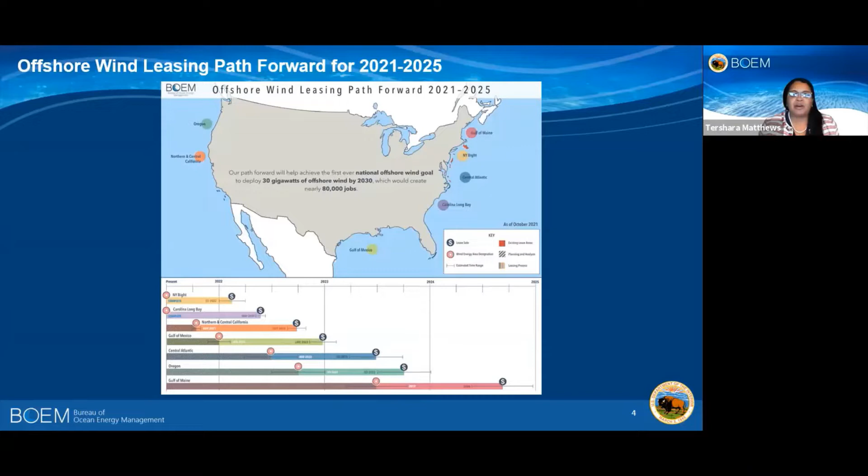In January, President Biden issued Executive Order 14008. It announced the first ever national offshore wind goal to deploy 30 gigawatts of offshore wind by 2030, which would create nearly 80,000 jobs. So what is our path forward to achieve this goal by 2030? Next slide. On October the 13th, Secretary Haaland announced our path forward for 2021 to 2025. This is our national leasing schedule. If you notice where all of the dollar signs are on the graph, that's where we have potential lease sales happening throughout the nation. Next slide. Next slide, hit one more time.

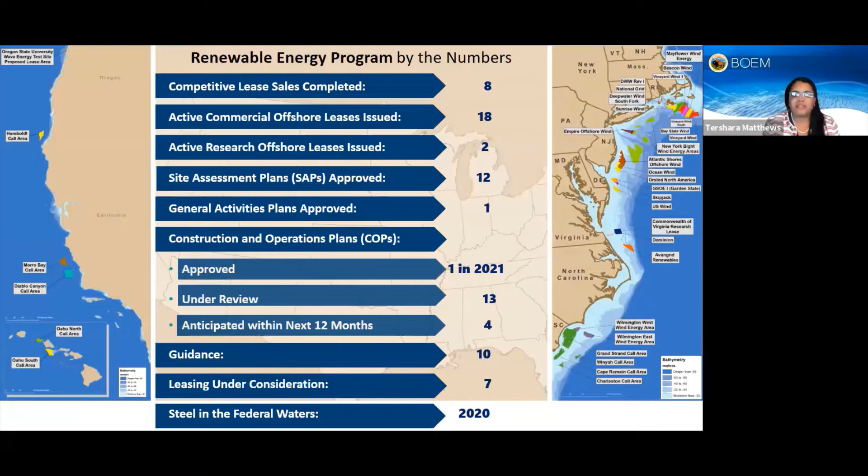So I wanted to give an overview of the actual renewable energy program throughout the nation by numbers. So we have completed 8 competitive lease sales. We have 18 active leases issued. We are also at that construction and operation phase, as I mentioned, in the Atlantic. We have approved 1 this year. We have 13 that are under review. We have 4 that are anticipated to come into the office within the next 12 months. And as I mentioned earlier, we have 7 areas that are under consideration for leasing. And we were extremely excited to have steel in the federal waters in 2020. Next slide.

So how are we going to get to that 30 by 30? We have the estimated capacity for those construction operation plans that have been filed to give us 19 gigawatts. For the remaining lease areas, we have 8 gigawatts. So we do need additional lease areas to achieve that 30 by 30 plan. Next.

So now I'm going to go a little bit deeper into the Gulf of Mexico. I'm going to give you a little bit of background information of how the program has recently started, talk about the renewable leasing process, and also the next steps for the program. Next slide.

So last year, we announced 2 studies that were conducted by the National Renewable Energy Lab, NREL. The first study looked at a survey and assessment of ocean renewable energy resources in all of the Gulf of Mexico. This included wave, wind, and also solar. We also conducted another study to look at the economic feasibility of wind in the Gulf of Mexico. Is it economically feasible to have wind in the Gulf of Mexico? And if so, where? So these 2 studies sparked an interest in the Gulf. Next slide.

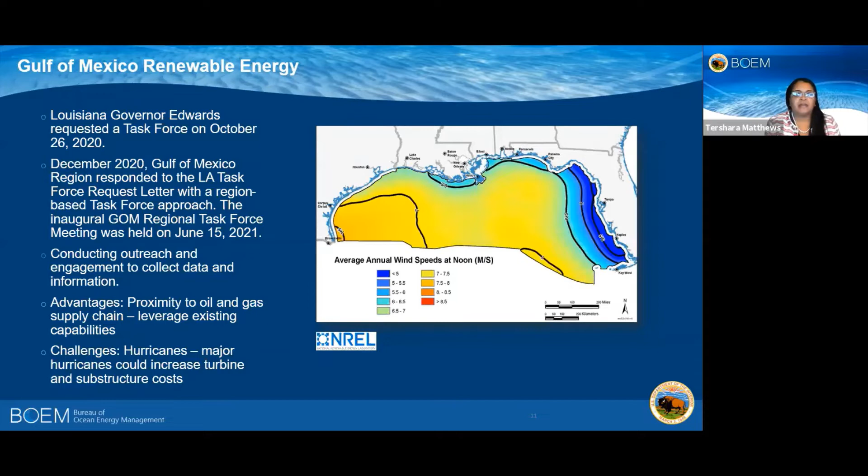Of course, as many of you know, there are definitely challenges with hurricanes in the Gulf. But after speaking to several industry representatives, they acknowledge that the hurricanes are a challenge. However, with technology, they feel that they'll be able to overcome those challenges with hurricanes. Next slide. As I mentioned, the 4 stages of the renewable energy process, you can go ahead, next slide.

The Gulf of Mexico is actually at the very beginning. We have not leased anything. We're in the process of working on a lease. So we're at that planning and analysis phase. We have formed that task force. We have issued the request for interest. We also recently issued the call for information. I'll talk about that in a little bit more.

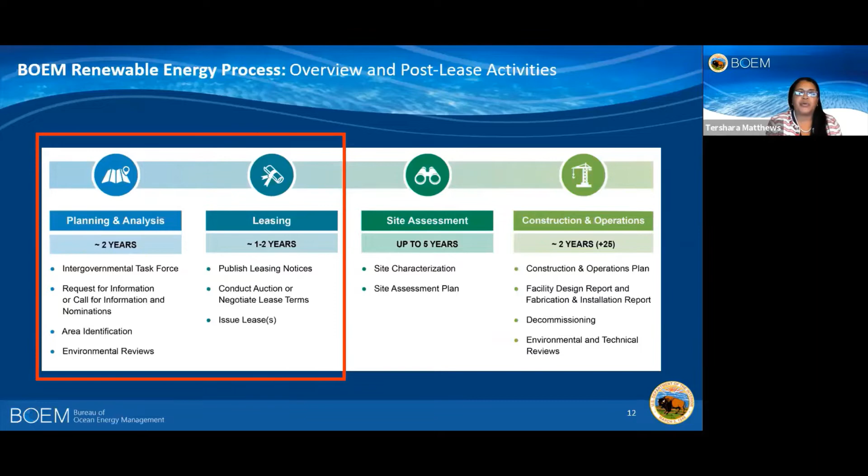The next step for that would be the area identification, where we have this lease sale, what areas, and then of course the environmental reviews. And as I mentioned in the earlier slide, we're slated to have a lease sale for December of 2022 or early 2023. Next slide.

So if you go a little bit deeper, you can go ahead, next slide. It shows the request for interest. That was published on June the 11th of this year. That included a 45-day comment period, which ended on July 26, 2021. Next slide.

Now we're at the call for information phase, which was just announced on Monday, November the 1st. That includes also a 45-day comment period, which will end on December the 16th of 2021. So following that call for information, we'll do more in-depth analysis to determine those wind energy areas. Next slide, please.

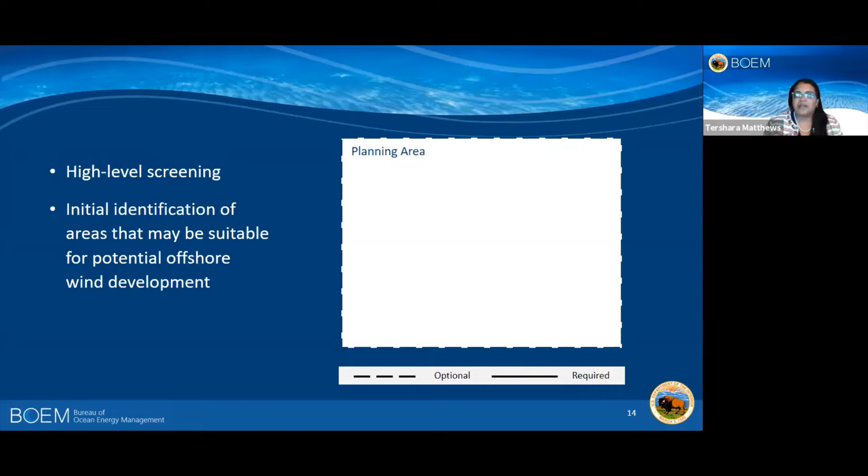So when you start out planning these wind energy areas, you start from a very large planning area. So for us, it was the Gulf of Mexico, and you do a high-level screening to best find out what are those suitable areas for offshore wind. The NREL study definitely helped us to try to narrow down where those areas are. Next slide.

So that helps after looking at where we think the interest may be. We were able to come up with a request for interest area to collect that information to see where industry is interested in, and what are some environmental concerns that we need to think about as we move throughout this process. It's definitely a winnowing down process. So next slide.

So now we have a call area, which is going to be a smaller area, and I'm going to show you maps to show you how we're going from this larger Gulf of Mexico down to this small call area. So these areas will definitely be considered for leasing. However, we will winnow this area down even more, looking at environmental, soil conditions, military concerns. Those are just some of the factors that we're analyzing as we determine these areas, and also existing oil and gas infrastructure that is also in the area. Next slide.

So the wind energy areas, once we have determined that area, they can be further divided into smaller lease areas, because companies may not want to bid on the whole area, so we can further divide that down into smaller pieces. Next slide.

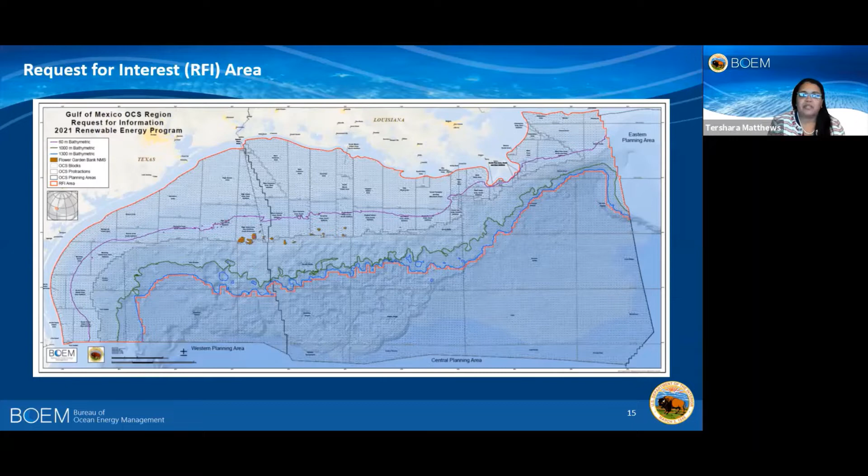So this was a request for interest area that we published in June. It goes from the Alabama-Florida line all the way to the Texas-Mexico border. The water depth goes out to 1,300 meters to see if anyone was interested in floating wind technology. So as you see, it's a very, very large area. So that starts with the first process. Where are you interested in possibly having offshore wind? Next slide.

From the RFI, we actually received 39 comments. 10 of those comments were from industry that provided us a little bit more information of where they're interested in their wind farm areas. Next slide.

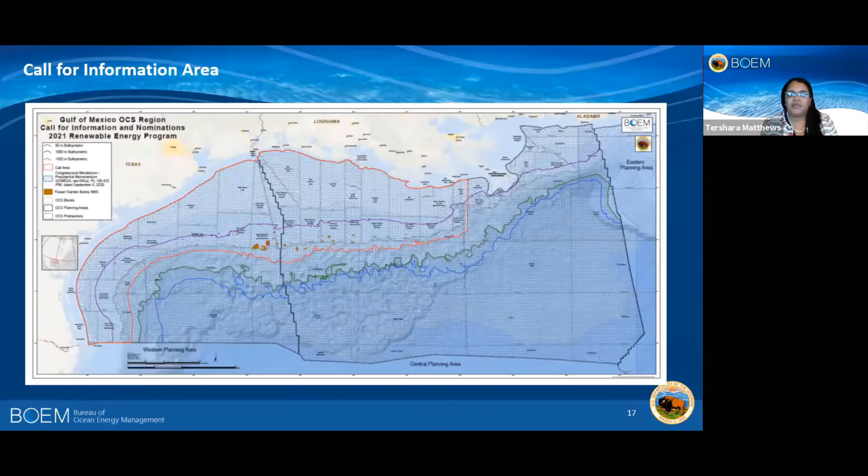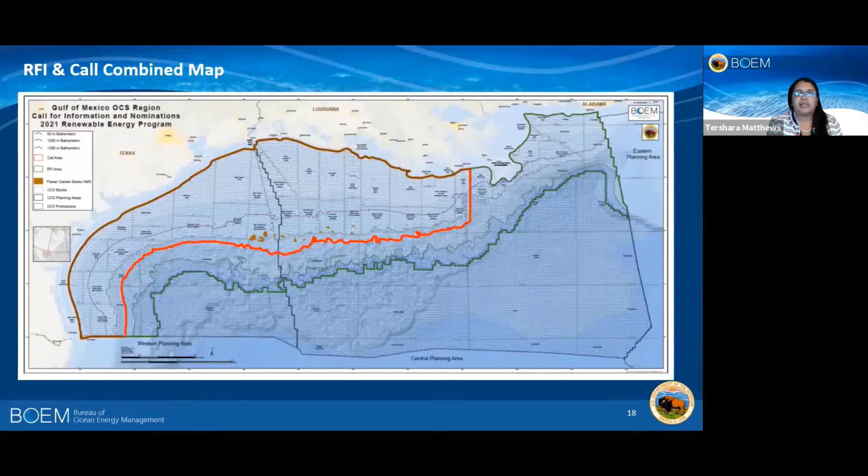So this is a combination map showing you the winnowing down process, how we have gone from the RFI area, which went out to Alabama, Florida. Now we're just off the coast of Louisiana and Texas, showing portions of our central planning area and the western planning area. Next slide.

So here are some of the next steps. As I mentioned, November the 1st was when the call went out. That closes on December the 16th. We will hold a second task force meeting in January. We'll start that environmental assessment on the call area and identify those wind areas. In the process, we'll also continue our stakeholder engagement. We have planned some fishery workshops that will also take place in January as well.

So as we continue to move through this process, we're gathering that information and data from our federal and state partners, tribal nations, and also the public, to better understand what areas need to be included in the wind energy areas as we continue to winnow down the areas in the Gulf of Mexico.

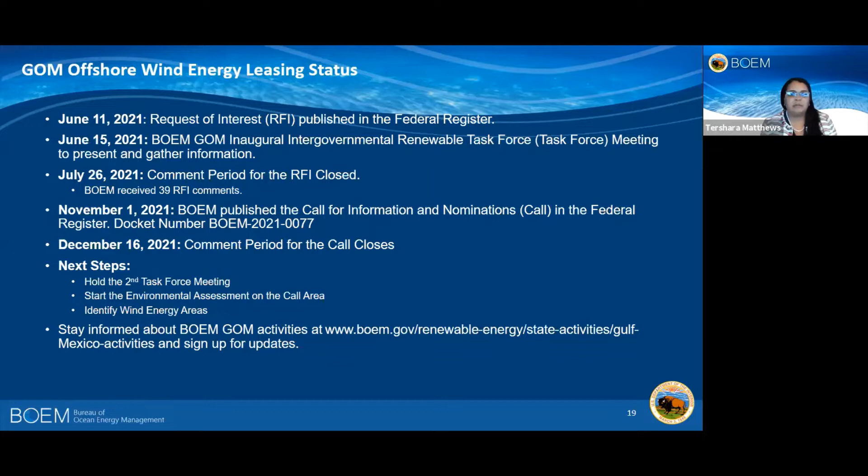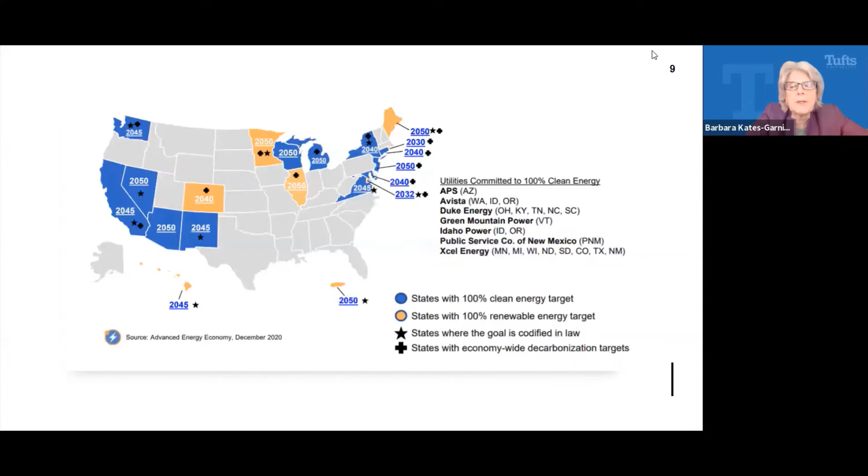And some states, and particularly states that really are planning for offshore wind, have also established roadmaps to clean energy. And it reinforces the point that offshore wind plays an important part. And if you're interested in learning about where the states are going in more detail, these roadmaps are really very helpful in understanding the transition to clean energy.

So how do we procure offshore wind? This is building off of BOEM. Usually it's the developers and the generators who bear the initial development costs. And what their costs are will become evident in their responses to the state RFPs, requests for proposals. Usually the method of procurement is a purchase power agreement.

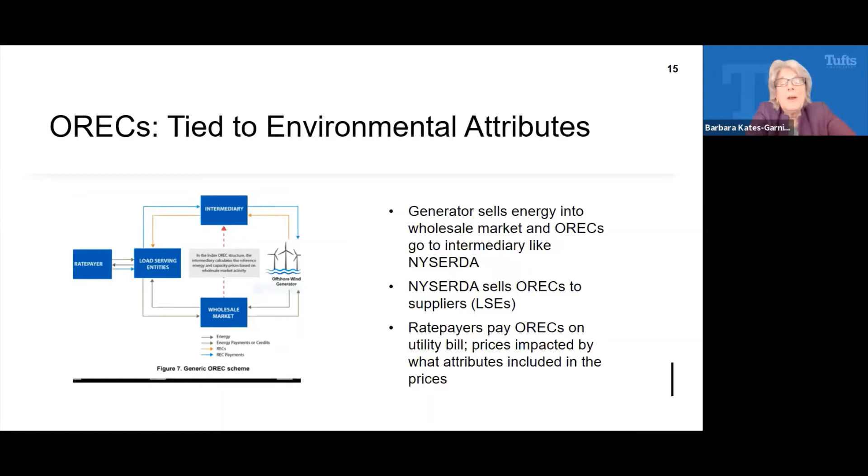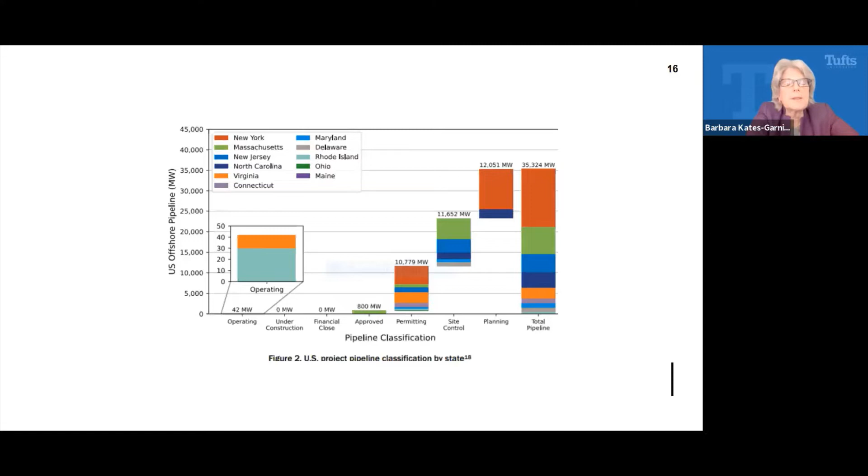Next slide, please. And again, this is sort of another reconfiguration, looking at the states, looking at the timelines, looking at what's procured. It's just very helpful to see what a large commitment these coastal states have made to date. Next slide, please.

Another big issue is offshore wind transmission and grid integration. We don't have a lot of time to discuss that. Maybe it's an issue that will come up in the question and answer. It's very important. Right now, the generators play a lot of role in the interconnection, but really FERC is looking at this in an ANOPR that it has just issued as part of a broader infrastructure look at grid integration.

How we configure the offshore grid will become very important. We don't want to stop the process, but we just have to say that this is going to be a very costly infrastructure build to get offshore wind into the grid.

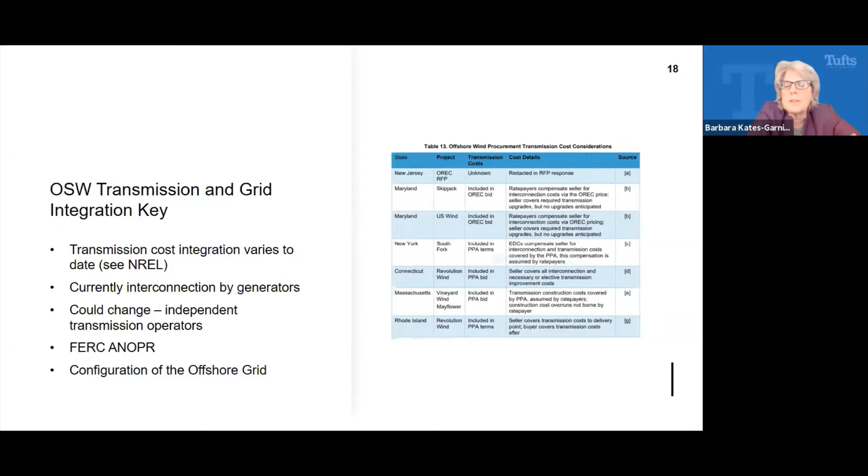Next slide, please. And finally, we've seen from my presentation that there are a lot of challenges. A lot of things are uncertain, but we really do need to achieve the promise of offshore wind. As I said, there are development challenges.

We have to look at more closely what kind of foundations we'll be using. We'll have to look at supply chain, ports, installation vessels. These could delay offshore wind if they're not done in a timely way. So even these aspirational goals could be delayed to a point in time where we won't meet our targets.

The environmental challenges are very real. We see the clean air and the emissions reduction, but their impacts on birds, right whales, the fishing industry, all of which have to be considered. I mentioned the infrastructure challenge, the grid integration, the siting, the role of FERC, the independent system operators, and the states are all going to have to get involved.

Pricing challenges. Yes, prices are falling. We still are going to need federal subsidies, but we need to, as consumers, better understand the true costs and benefits of these projects. And finally, public engagement. And this relates to equity. What is meaningful engagement? At what stage of the process does it happen? Otherwise, we're not going to realize the jobs, the goal of the price reduction, and ultimately the clean energy.

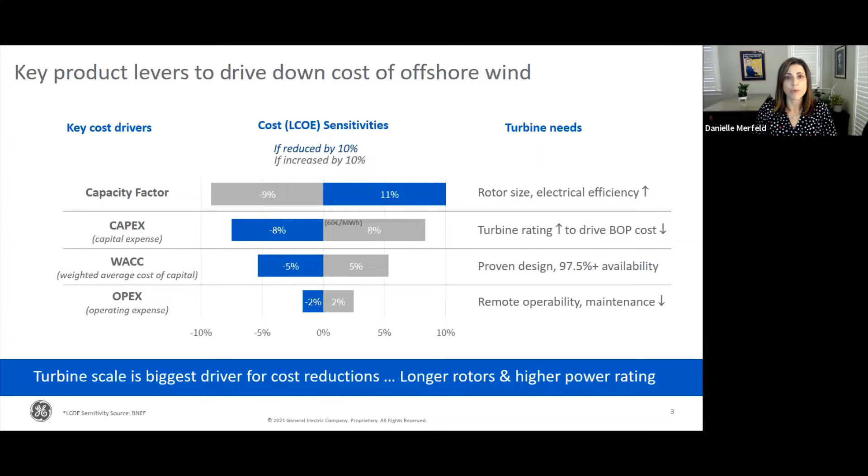And just one little fun fact here: just one rotation of these size turbine blades could power a home for 2 days. So having hundreds of these out in the ocean creating power, it's easy to think about it in numbers, but it's hard to relate to them sometimes. It's just a magnificent amount of energy that we can access with something that's a free resource.

So if you look at this page, the things to take away are what technology development we need to continue to reduce cost, especially at this huge scale. One category would be around the controls, which is just another word for the brains of the system. If you can make your system smarter, where it can help self-commission when you're installing it, or learn as it sits in a site and adapt and be more resilient to its environment, or more efficient, that improves your cost because your system can be more efficient or have better operation over the lifetime.

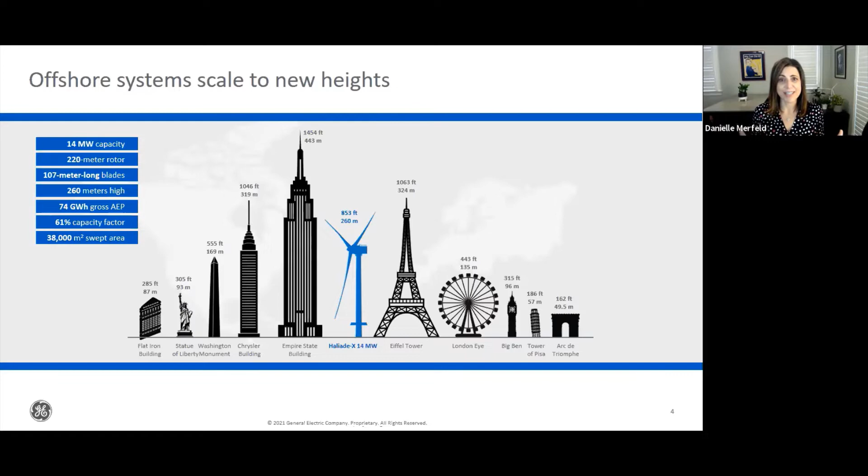Next slide, please. So thinking about beyond the turbine itself, because once in operation, there's great ways to imagine making it more efficient, making it better, but the process of manufacturing it, there's a tremendous amount of technology opportunity here too. And I would say it's driven primarily by the fact that the scaling, the size that we're working at now requires us to think differently.

This is an incredibly large system, and being able to make this, we just can't make it in the same way we made it when it was 20 meters or 40 or 50 meters. It requires a completely different mindset, and that's part of what the industry is doing to innovate manufacturing.

Other things besides the blade are, how are we thinking about new equipment to last longer in a saline environment, or how do we harden some of the ball bearings and parts of the gear systems that are used, or the pitch systems that move the blades around to catch the wind best. All of this in bringing automation to it, but also new materials, new design techniques. All of the manufacturers in this space are looking at how to improve the process. And we're going to really lean on our suppliers to invent and invest as well.

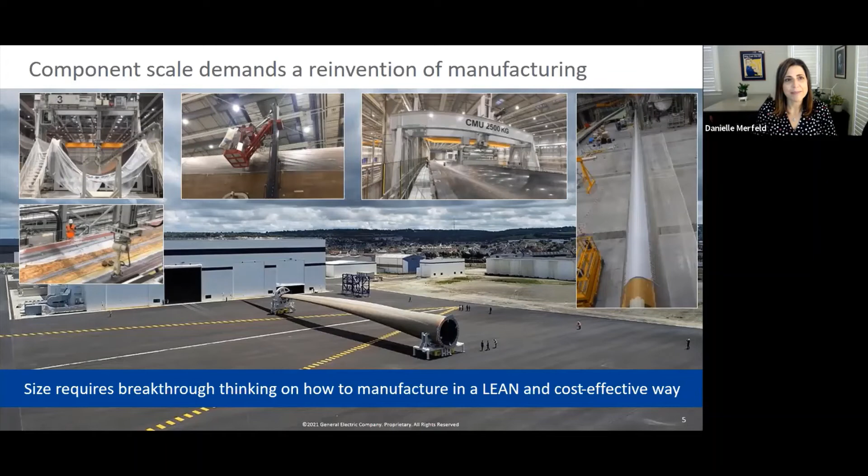But the tools and techniques we're going to use to put this offshore, now that we've built these, we have a big farm off the coast of France with many of these. This is a different way to think about offshore. Our offshore sites today, from my personal perspective from GE, have a lot more of the smaller turbines, and these larger ones are going to be going up very soon. So the rest of the world is kind of building out offshore, and I think we're going to do a lot of learning that we can bring to the United States.

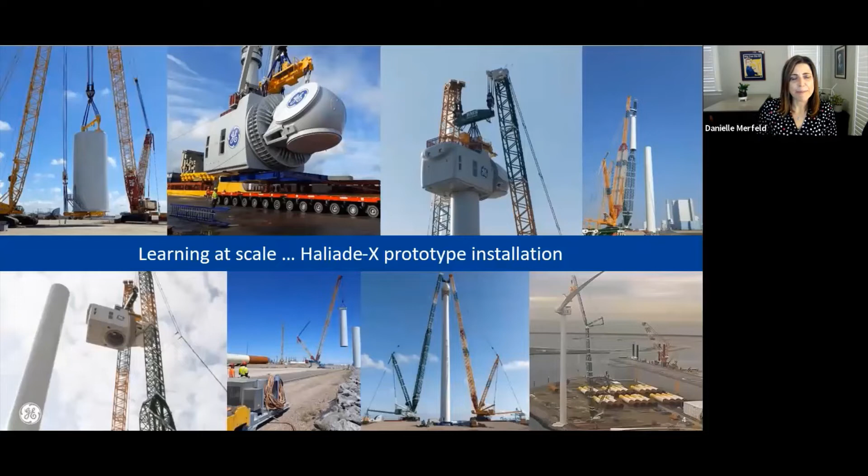Next page is really thinking about risk. So one of the reasons why there are so few developers and operating and equipment leaders in this space is because it's hard to do, and there's a tremendous amount of risk in doing it. So one of the key things around introducing technology into the space is how do we reduce risk at all stages of the technology development, all the way through to the deployment of the system.

We have to be able to test our blades for 20 to 40 years of operation within a year, so that we can understand if that design holds up. So the system tests are also critical. And then, as I just showed you on the last page, building prototypes, putting out that whole system all at once and understanding how it changes in different environments, different performance factors, that's going to add another cycle of learning. But we can't jump right to that. This whole flow is really critical to ensuring that we don't overextend on the risk side.

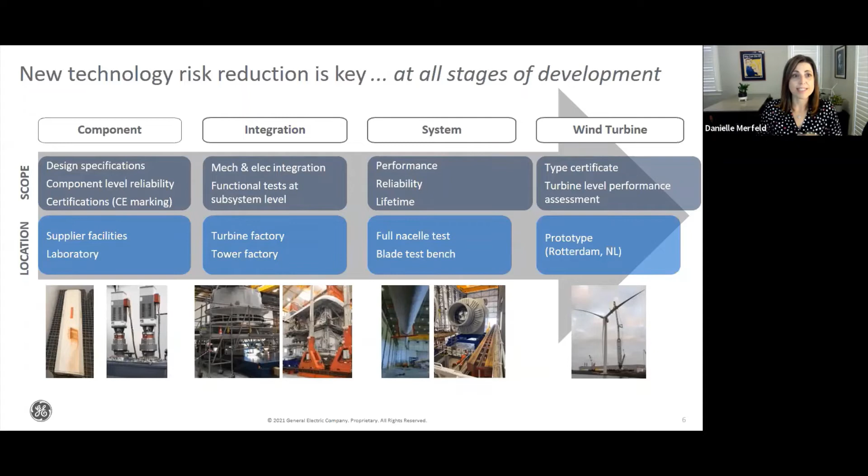Other things that are going to help us lower the cost of service and lower the amount of times we need to go and visit these offshore turbines are certainly around design validation. We've got to make sure what we put out there works the way we expect and performs the way that it's expected, even under very extreme conditions. You know, hurricanes are not going away. We have to live through those, and severe storms out on the coast. Also, digital solutions. As I mentioned before, there's been tremendous progress here. So having remote ability to do things from shore, or being able to have smart O&M strategies, even robotics, is going to be critical. And let me move to the next page real quick, because there are a couple points here I just want to make quickly.

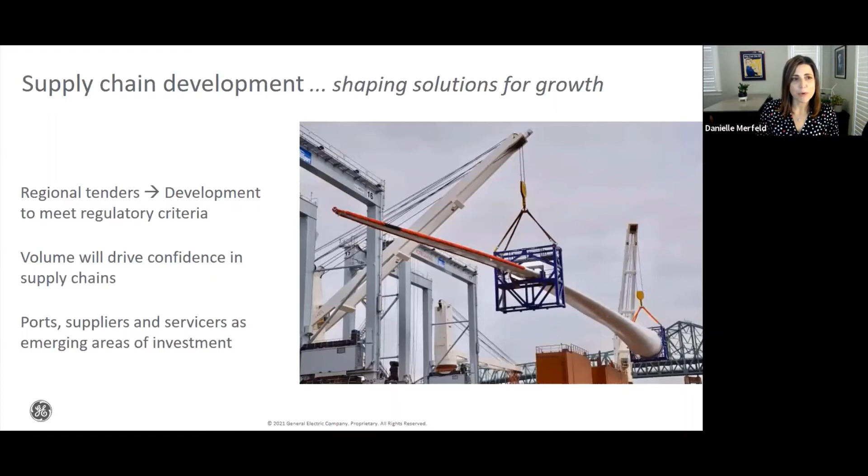The next page is a little bit more detail on that, essentially showing some of the vessels that we would need. There's very few vessels that can carry the kind of offshore wind components that we're talking about. And the few that are there, we're going to need multiples of them to grow at the pace to meet this 30 gigawatts by the end of the decade. And by the end of the decade, some of those vessels will be obsolete because we'll even move to bigger, larger systems.

And we have some market restrictions that we have to work around here in the US, such as the Jones Act, meaning that we need to have US flagged and fleet vehicles. So we can't really borrow the fleets that exist around the world to come here and grow ours. We have to grow our fleets as well. And similarly, our harbors have to be developed so we have more space.

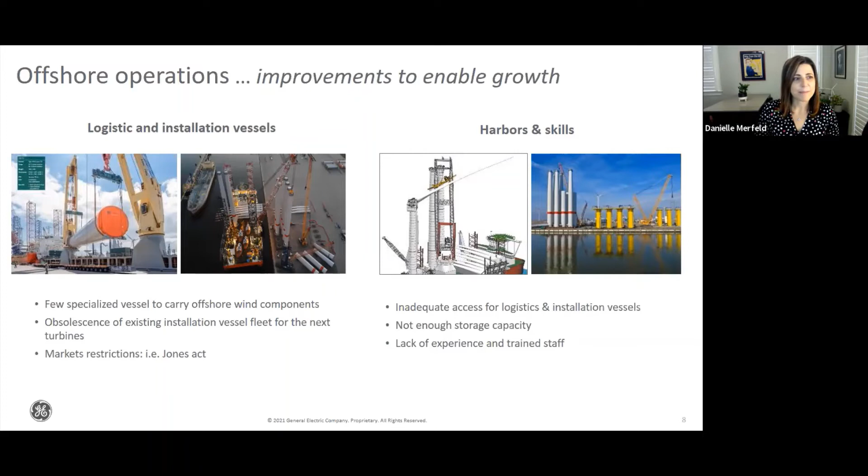Next page, I just want to get to quickly. You heard about floating offshore. This is just today a very niche segment. There's a lot of technology that will come into play here. And it's important for the US because 60% of our resources are in deep waters where we can't have standard foundations. So we're going to need one of these, just a few examples shown here on the right. Costs will come down and we're going to want to access a lot of those new resources, but it can only be done with this new approach.

And I would say the biggest hurdle today, besides the floating foundation development, is the controls. Having a system that has to operate under so many different conditions, efficiently over such a long time, requires really strong control of that system.

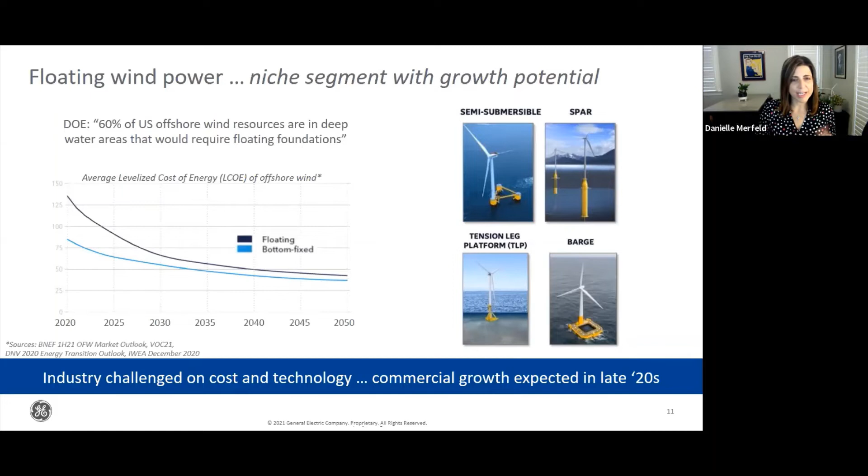And then the last couple pages, if you could just go to the next one, please. I just want to say it's not enough to make the power offshore. You have to get it to onshore. And there's a lot of pieces to this technology challenge and operational challenge, from getting it to an offshore electrical platform and then converting that to be transformed and sent undersea to the land. This is just an example.

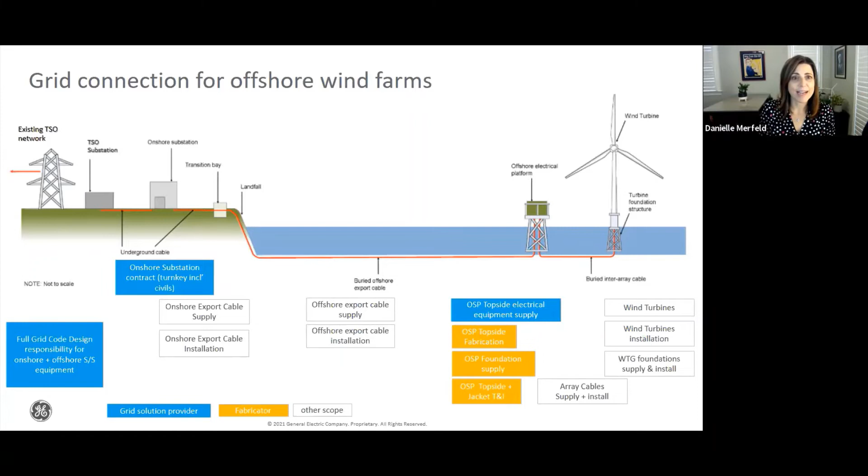Many of our offshore wind farms today, and the only one we have in the US right now, use an AC connection. But if you go to the next page, what you'll start to hear more about is the increasing amount of wind farms that are connected to shore by an HVDC connection. And really the trade-off here is cost, and maybe the best way to think about it is there's a break-even point for when you move from AC to DC, because AC is relatively cheap on land, but it starts to attenuate greatly and it's more lossy underwater.

So the break-even point, whether you're choosing AC or DC, is about 800 kilometers for overhead lines and about 50 kilometers for buried or undersea cables. So if your offshore wind farm is more than 50 kilometers offshore, you're probably going to choose HVDC. And if not, you could go with AC as a cheaper option.

But just to give you a perspective, that big yellow box there, that's actually as tall as a 15-story building. That's the electrical converter that holds the HVDC system. As wide as a football field. It's built onshore and towed out to sea and then connected to the wind farm. So these are, again, big engineering challenges and feats of impressive capability that we're building.

And I just think it's important to understand that it's not enough to have the wind farm. Connecting these to shore and getting them integrated into our electrical grid is probably the bigger challenge today that is standing between us and our 2030 goal in the US of 30 gigawatts.

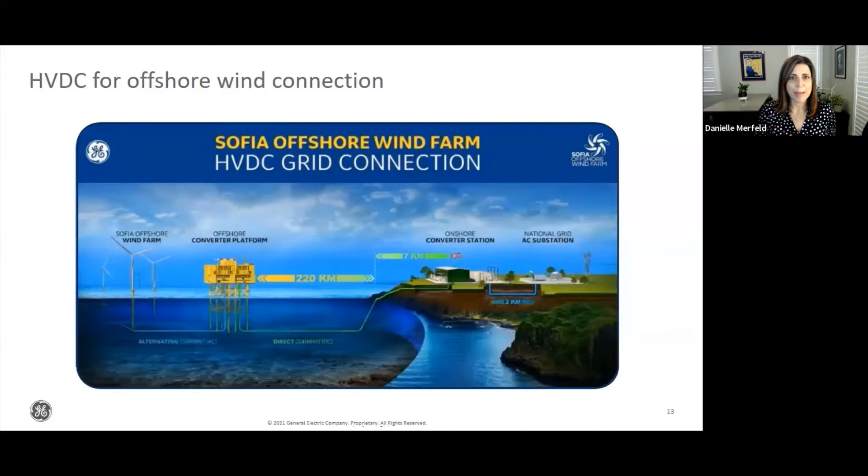So I'll just wrap up on my last page by showcasing those points that I've been making throughout here, starting with technology, the supply chain development. Reducing risk is not enough. We also need the infrastructure development and to continuously learn from what we're doing.

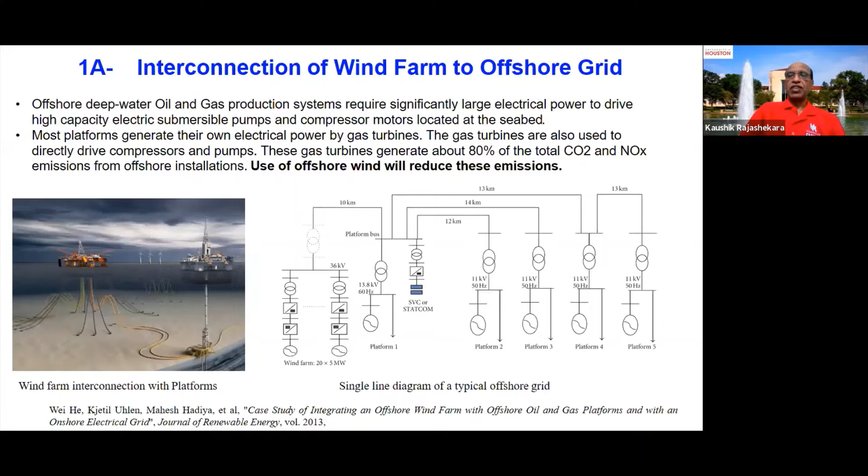So there are a number of platforms. These platforms can be directly powered from the power generated by the offshore wind. Of course, you need to have an inverter, another platform where the power conversion is done, and then the power has to be supplied to the different platforms. So this is one example. Next slide, please.

So, for example, it can have its own microgrid where the offshore wind is supplying one platform. This shows, for example, 5 megawatt wind generators. They're all connected together, and it is easy to parallel their power on the DC side. The generator output goes to the AC-DC converters, and then there is a DC system. From DC, you have the inverters, which can drive the various pumps, compressors and other loads.

The offshore wind can also be used to connect to the onshore grid. For example, this is a DC to AC inverter. This is similar to what we saw in the slide by Danielle from GE, that yellow platform showing the power conversion system. So you can have it here, and then it can be transferred as AC power to the system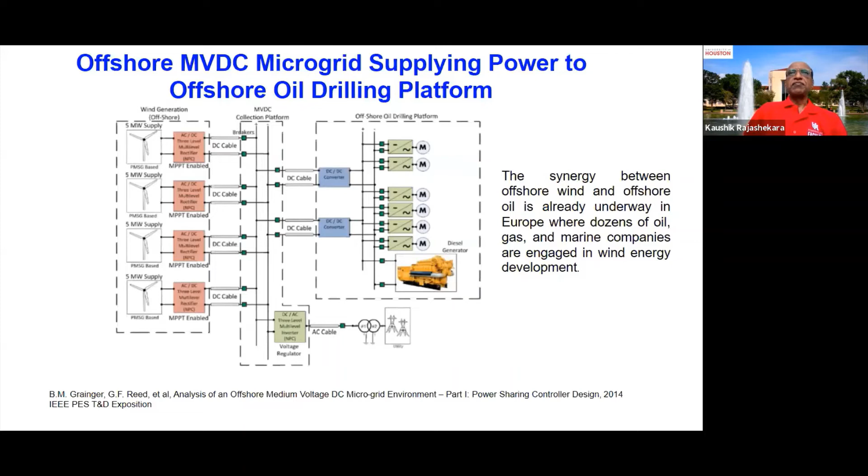of the utilities onshore. This synergy between offshore wind and offshore oil is already underway in Europe, where a number of companies are already engaged in using offshore wind for oil and gas production. Next slide, please. I'll try to move it myself.

Another opportunity for offshore wind is the subsea oil extraction field. The trend in the oil and gas industry is to go subsea for the whole production system. We talked about power generation on the platform. Instead of generating power on the platform with a separate bus going from the platform to every individual load, like pumps, compressors and other electrical loads, you can have the entire distribution on the seabed.

That is coming up, and many major oil companies and Siemens and ABB are all exploring that. They've also tried installing several electrical systems under the ocean. That requires a subsea power grid designed at a depth of about 10,000 feet, and then you don't need any platform. It can go as deep as 30,000 feet.

Of course, there are several challenges in putting electronics, like power electronics, at that depth, because pressure is another criterion. For every 10,000 feet, the pressure increases by 100 bar. At 30,000 feet, there is 300 bar pressure. So the systems have to be designed to meet that pressure, and also corrosion. And also, how do you service the equipment if something fails?

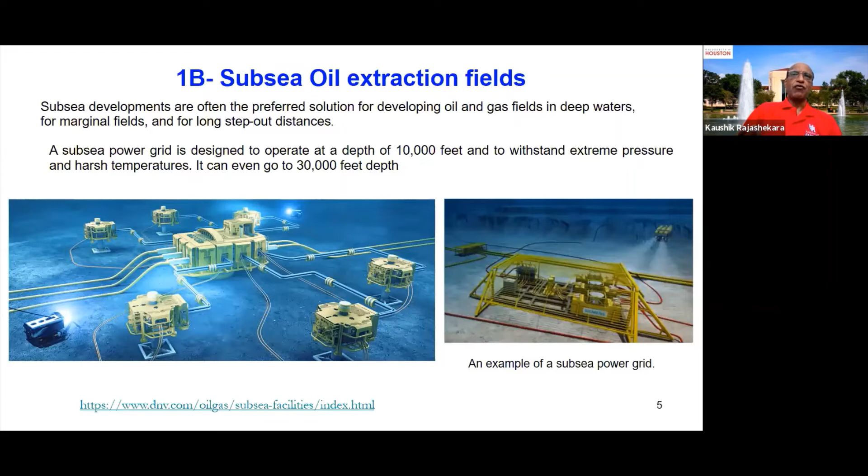So a lot of work has been done bringing the shore power to the subsea power systems, using HVDC lines or HVAC lines, or even low frequency AC like 16 and 2/3 hertz. That type of work has been done, but still a lot of work has to be done in this area. Next slide, please.

So now for the subsea, instead of getting the power from the shore, you can use the offshore wind. And so this is the subsea system. If you are using the power from the grid, this cable can be hundreds of kilometers. So instead of using hundreds of kilometers of subsea power cable, if you use the offshore wind, then we save a lot of power, and also offshore wind can be efficiently utilized.

And it can power a lot of the subsea pump motors, subsea compressors, and there are several other loads I will show you in the next slide. So again, the distribution voltage is around 36 kV, and the power can be 10 to 15 megawatts for the compressors, and the total power can be as high as 100 megawatts. So next slide, please.

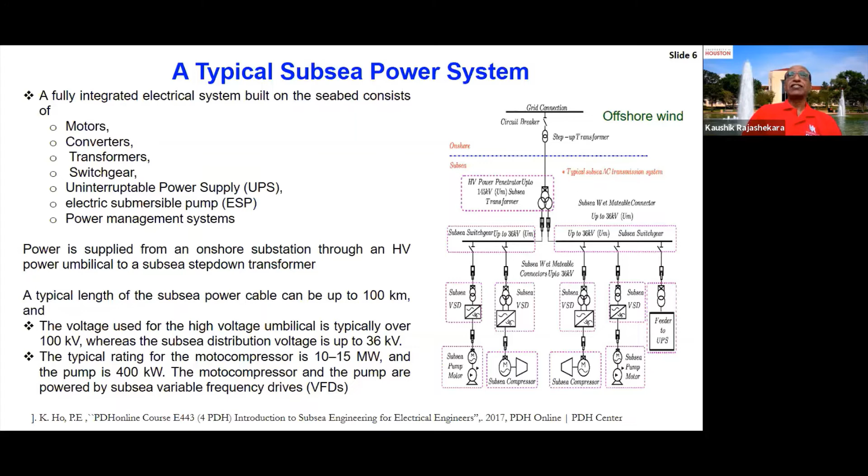So this gives an idea for one subsea plant, how much power is required. This is just a typical example. For example, pumps can take up to 10 to 15 megawatts, and there are other electrical systems that need lower power. So if you add all these things, it needs hundreds of megawatts of power. So that can come from the offshore wind. Next slide, please.

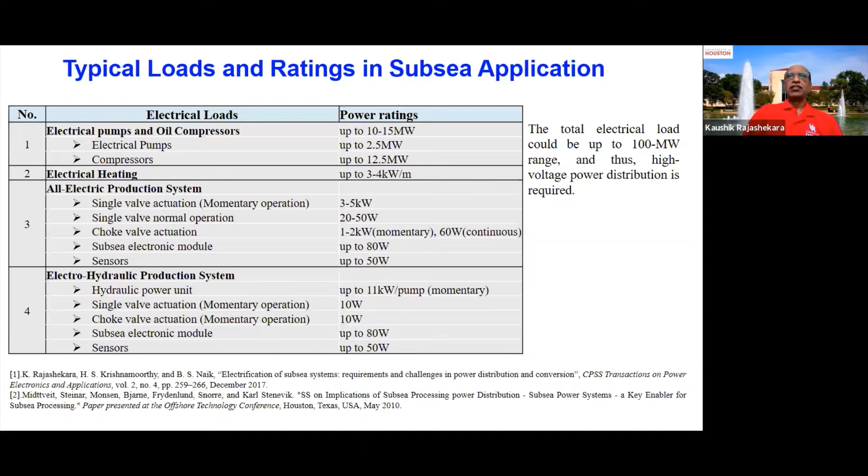So we have a small consortium in our university where we are working on subsea electrical systems, where Chevron, ExxonMobil, Shell, TechnipFMC, Siemens are all members. And also we have a Subsea Systems Institute at the University of Houston. So how do you take care of this stochastic nature of the wind?

So we are trying to combine the offshore wind with fuel cells and battery energy storage systems so that you will have a stable grid. So even in case of any transients or if there is no wind, we can still supply the power to the subsea loads. And excess wind can be used to generate green hydrogen. For example, we can have an electrolyzer there and supply the fuel cells.

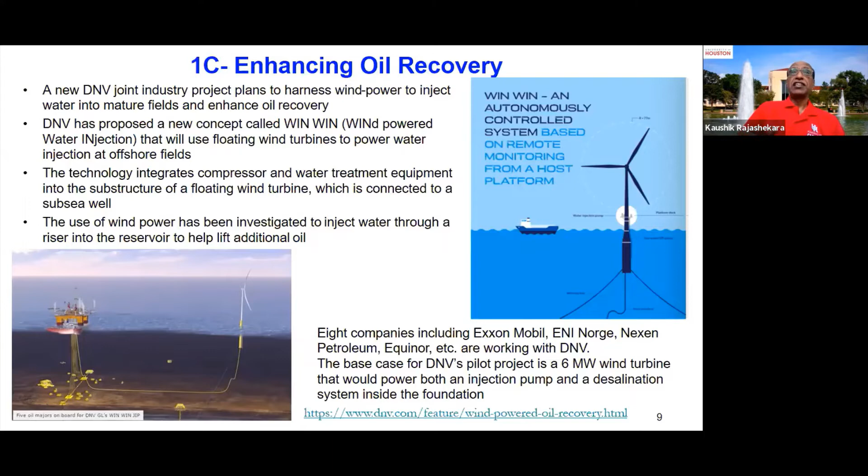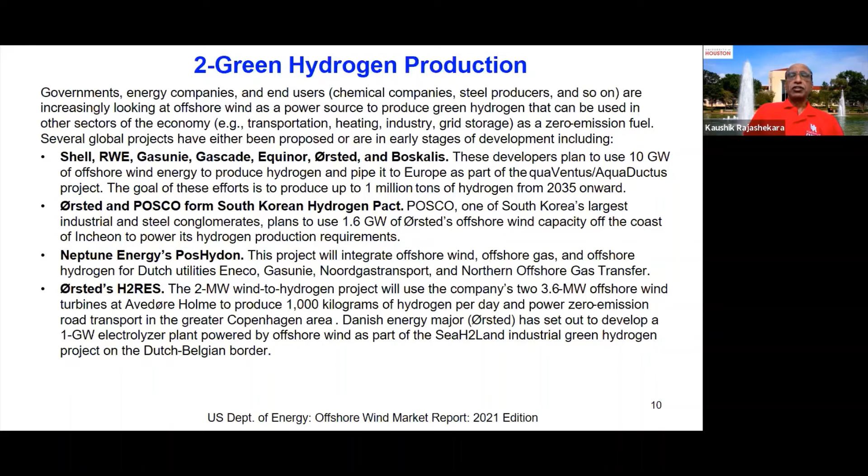And then Ørsted's H2RES, the 2 megawatt wind-to-hydrogen project, will use the company's 3.6 megawatt offshore wind turbines to produce 1,000 kilograms of hydrogen per day and power zero-emission road transport in the greater Copenhagen area. So there is a lot of work going on in producing green hydrogen from offshore wind energy systems. Next slide, please.

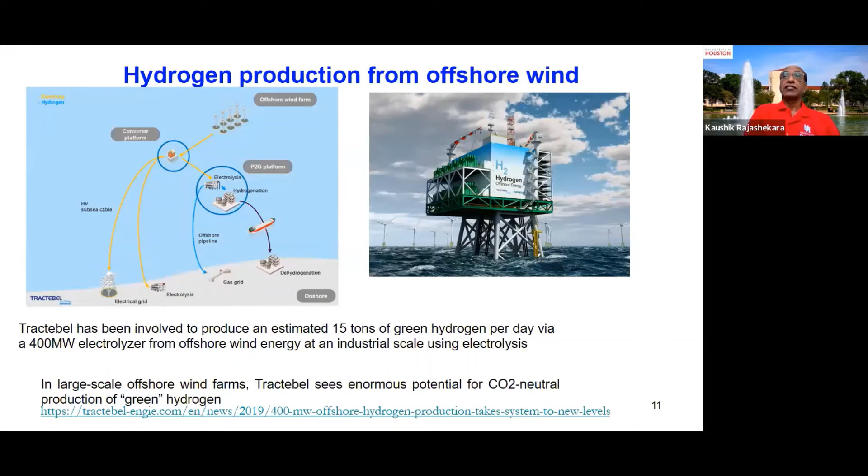Another application of offshore wind is shore power for powering vessels. Companies like Wärtsilä are all looking at the use of offshore wind for shore power for decarbonization. For example, if the shore power is coming from offshore wind, which is renewable energy, then we can eliminate a lot of the carbon dioxide emissions generated by connecting all those vessels to the power grid when they are at the shore.

And also, if the vessels are not traveling very far from the shore, depending on the size of the vessel, it can be used for charging the batteries if they are purely electric, or if they are fuel cell or hydrogen based, the hydrogen generated can be used to fuel them. There are a number of proposals to develop offshore wind on the California coast, including floating wind farms. For example, in 2007, California mandated that at least half of all container ships run on shore-side electricity at berth, so that power can come from offshore wind. The next slide, please.

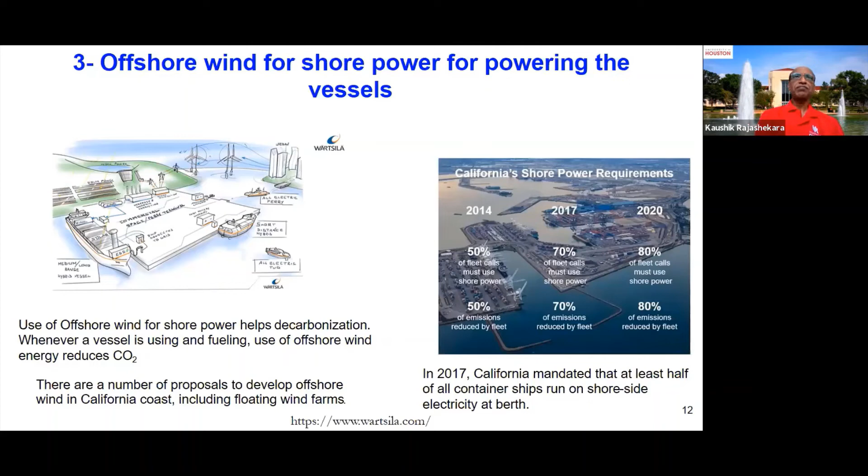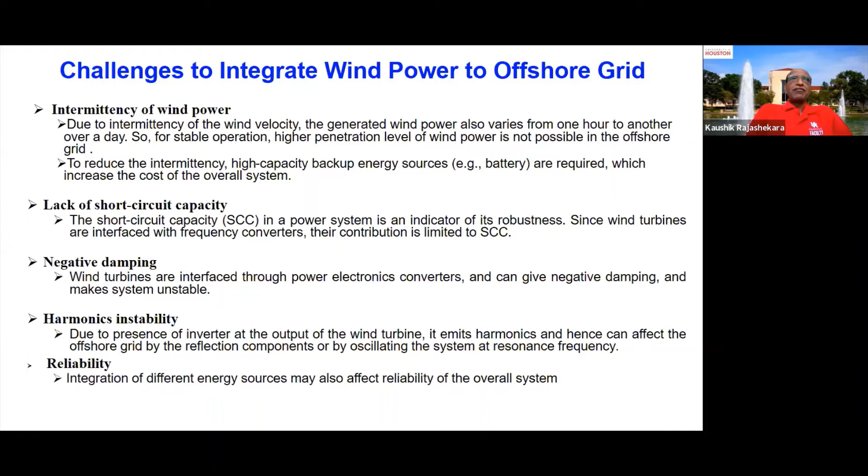And next one is my last slide. So next slide, please. Yeah.

Operation and maintenance costs also are very important, and due to the intermittency of wind power, high penetration in the offshore grid is not possible for stable grid operation. And we need large backup batteries depending on the system.